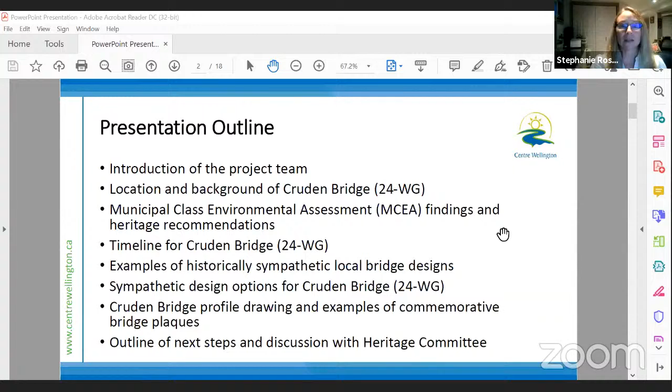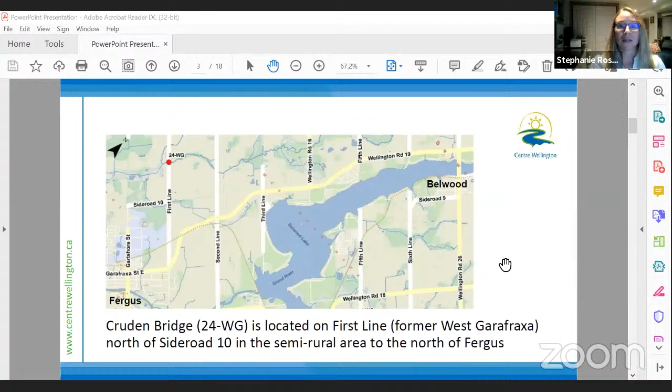So to give you some background on the Cruden Bridge, it is a 75-foot single span bridge. It is one lane and was constructed as a concrete bowstring arch bridge, and it spans over the Irvine Creek. It was built around 1922.

So the bridge was closed in July of 2018 due to the severity of its structural deterioration at that point. Later that same year, in 2018, we began a Schedule B Municipal Class Environmental Assessment to identify potential solutions to address the advanced deterioration and determine a recommended preferred option for what solution to move ahead with implementing.

So the EA study included a cultural heritage evaluation report, as well as a heritage impact assessment and a hydrologic and hydraulic analysis, as well as a natural environment review and an arborist's report.

Four alternatives were considered during the EA study. Those included the do nothing alternative, which is essentially maintaining the status quo of leaving the existing closed bridge in place, where the structural deterioration would continue and the bridge would remain closed. The second alternative considered was to rehabilitate the existing bridge in place. We also looked at replacing the bridge with a new bridge structure, and finally reviewed removing the bridge, which would mean that crossing along First Line would have been closed.

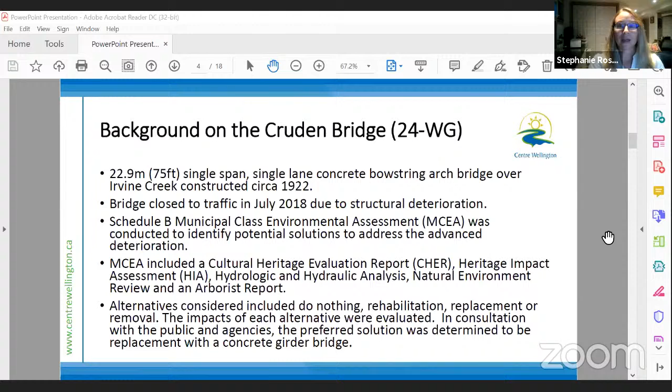So for the highlights from the Municipal Class Environmental Assessment, the recommendations of the Heritage Impact Assessment study regarding the bridge's sympathetic design and commemorative strategy included three main recommendations.

The first of those being that the bridge in its setting should be professionally documented before any construction started. That has actually already been done. It was included as part of the Heritage Impact Assessment and the Cultural Heritage Evaluation Report, and those documents are both available online at our website, connectcw.ca.

The second major recommendation from the Heritage Impact Assessment was that the replacement bridge structure should be designed in a manner that is sympathetic to the cultural heritage attributes of the existing bridge. For example, cast-in-place concrete barrier walls could be designed to incorporate visual elements sympathetic to the look and aesthetic of the existing bowstring arch bridge. One way of doing that is for the exterior finishes or impressions to be cast into the surface of the concrete barrier walls, featuring an arch design.

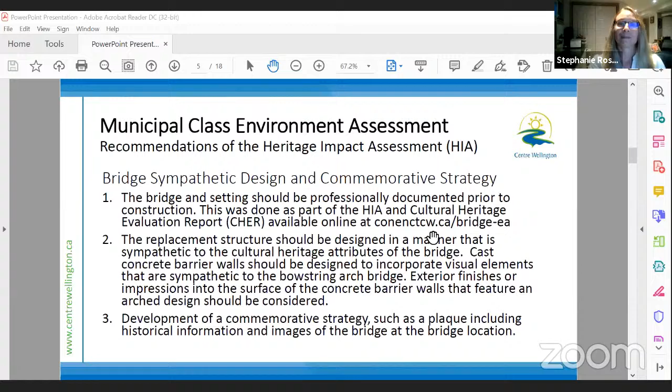To give an overview of the timeline for the Cruden Bridge project: the original bridge was built in 1922, and here we are roughly 100 years later getting ready to replace it in 2022. The bridge was closed in July 2018, and the Class EA began in November 2018. The EA process included two public open house meetings and two meetings with the Heritage Committee. The EA was completed, and the notice of completion was filed in January 2020.

Subsequently, in February 2021, we awarded the bridge design, construction, and contract administration to the Triton Engineering Services team. And here we are today in October 2021, beginning our consultation process with the Heritage Committee for our commemorative strategy.

Looking ahead, we hope to receive input back from the Heritage Committee around the middle of next month to find out which of the sympathetic bridge design options is preferred for the imprint in the concrete parapet walls. We've also allowed additional time for the Committee to provide input on the wording for the Heritage Plaque, and we're hoping to hear back on that by about March 2022.

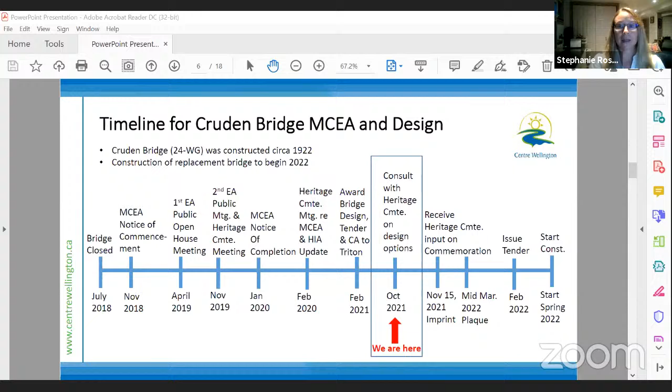I'll turn the presentation over to Dave, who's going to give us some examples of different cast-in-place impressions that have been used on other local bridges. Thanks, Stephanie.

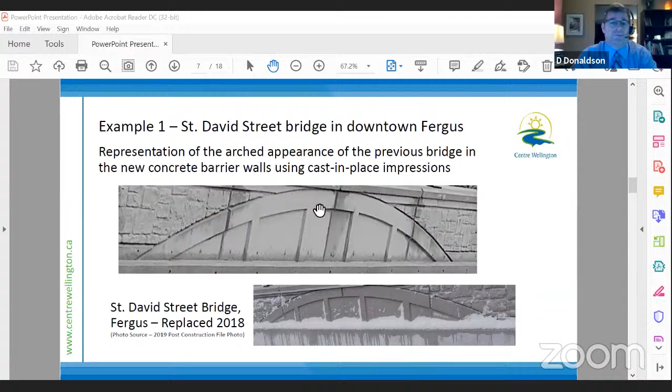And now I'm going to direct your attention to Chris Middleton of Doug Dixon and Associates for our Cruden Bridge presentation. Thanks, Dave. Hello, or good evening, everyone.

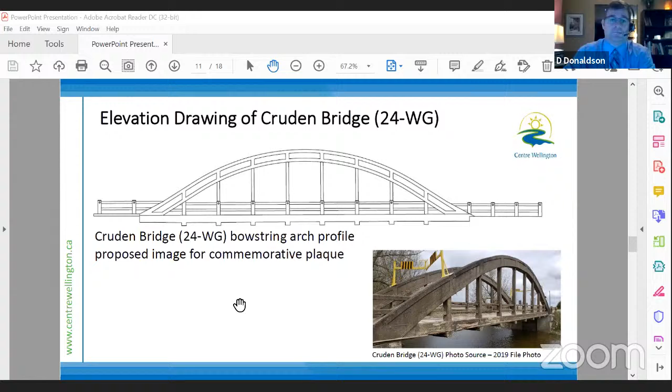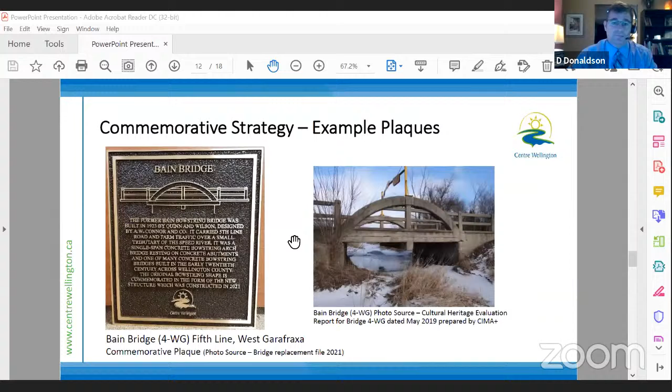Second example we have for you is back over in Elora for the former Victoria Street Bridge. Again, just a simplified version elevation drawing on the plaque with some commemorative narrative commentary put towards the previous bridge in its place.

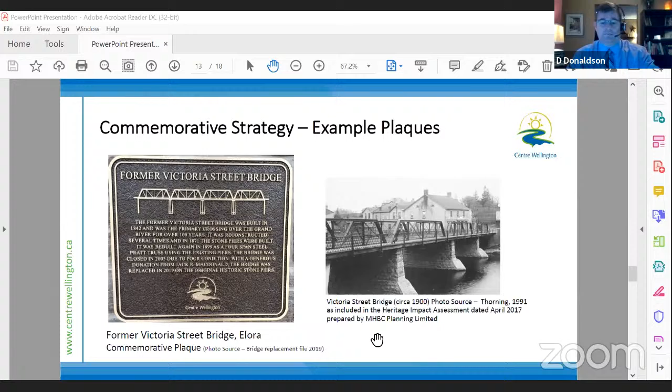The third example we have for you is the St. David Street Bridge, which was actually built back in 1926. Again, a small plaque which was used to commemorate the previous structure back in that era.

The next and final slide here we have for plaques was done on 27 WG on the former township of West Garafraxa out on the 20th Side Road. That was the Kerrs Hill Bridge. That plaque was put in place during that part of that construction back in 2017.

The next slide illustrates various slide plaque mounts. The first one on the left is a typical pedestal mount, put in at the St. David Street Bridge here in Fergus. The next two are the most common, used at the Kerrs Bridge and Bain Bridge, which are recessed plaque mounts. The last example, in the bottom right corner, is the surface mount, which is not as common.

For this particular example, for the first line for 24 WG, we propose not putting the plaque on a pedestal mount for two reasons. One, we don't have any sidewalk like at St. David Street to mount the pedestal on. Plus, since it's only a 2-lane rural road, we don't have a safe enough area for onlookers or tourists to park on the side of the road while traffic continues to go by, to view the plaque.

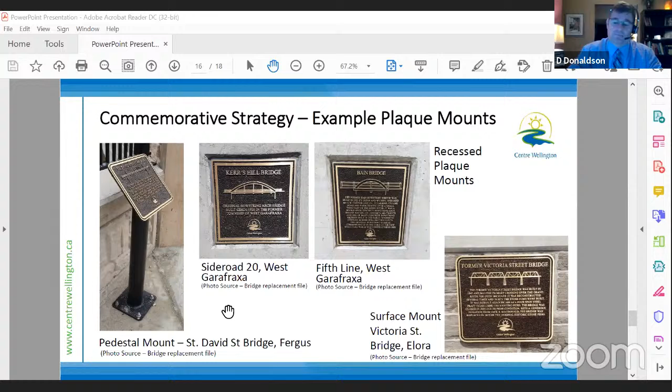Stephanie, I'll let you summarize. There you go, unmuted, that would help.

Thanks, Dave, for that. To highlight our next steps: today we hope to have a good discussion with the Heritage Committee and get some initial feedback on the historically sympathetic bridge design and the commemorative plaque, and to answer any questions you may have. We look forward to hearing from you, hopefully around the middle of next month, on what your preferred option is for the sympathetic design imprint for the Bridge 24 WG concrete parapet walls.

We've also allowed some time for the Heritage Committee to think about what wording they'd like for the historical narrative for the commemorative plaque. We're hoping to receive that input from the committee by about mid-March 2022, as well as what location they would prefer for the plaque to be embedded on the bridge itself.

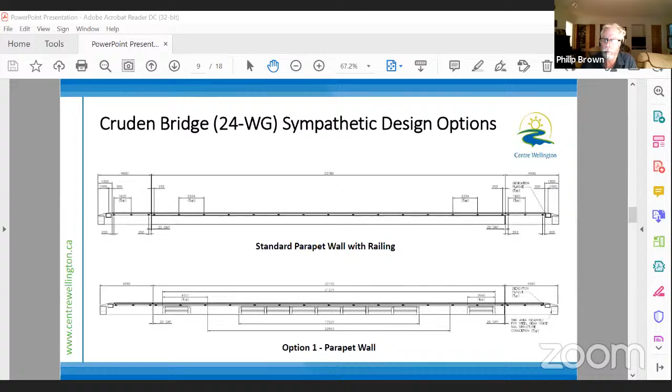Okay, thank you. It's Chris here. That's definitely very easy. We can take the single panels at the end there, which reflected the railing on the existing retaining walls shown in option 1, and just incorporate those into option 3 — just the one panel, or two rails between the two posts, there on both sides, easily combined with option 3 to make an option 4.

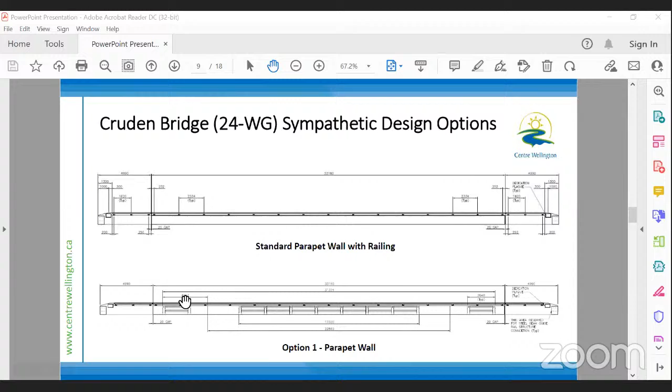And my other question was concerning the location of the plaque. I understand there's safety concerns, and I really wish each one of these bridges had some sort of a little rest area where the plaques could go.

Beside them, but obviously they don't, at least not at this time. Who knows, in the future there might be, because it would be access to the stream and the river there as well.

But I'm wondering, is there any thought of mounting—because I'm not sure who is actually ever going to see the plaque on the outside of the bridge in its location. I understand why it's there, for engineering and safety reasons. I'm wondering if it's possible to put the plaque on that sloped end of the bridge.

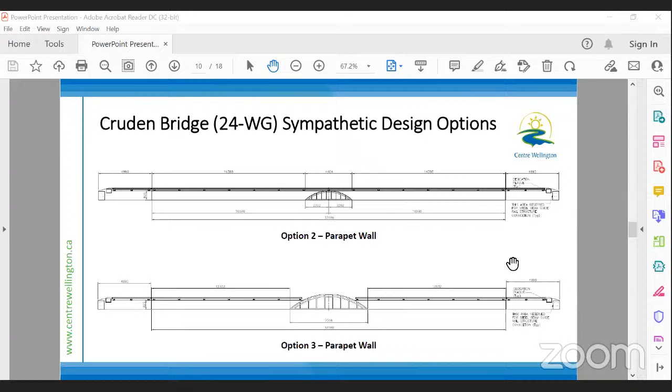Sorry, it's Chris again here. So on all of the options, you can see there's a rectangle at the end of the parapets, and there's a note right there, the dedication plaque. So right now we've currently shown it in the end post of the parapet wall, in the upper portion.

That would be on the inside face, on the road side. That's on the inside, okay.

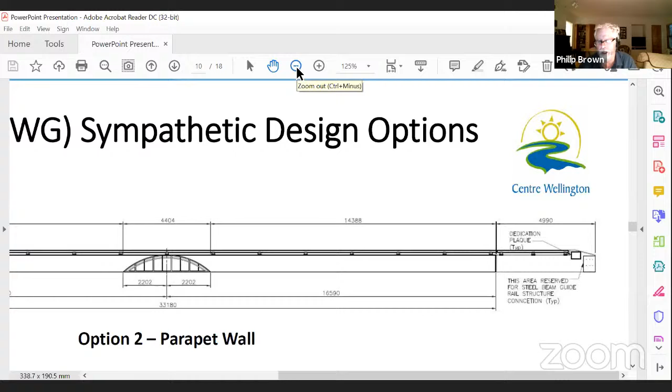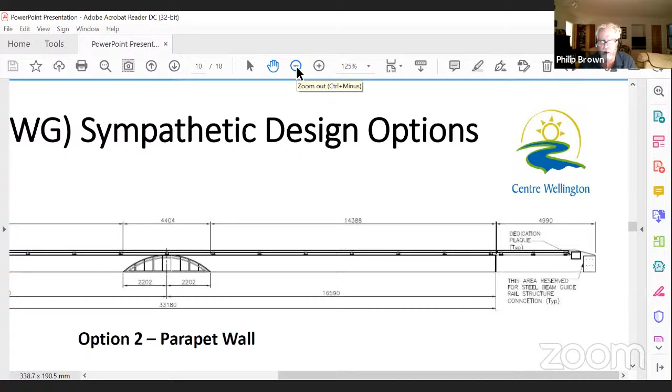I'm wondering, perhaps if somebody ever decides to go read that plaque, if they're on the southeast approach to the road, they'll actually be with their backs to the traffic. I'm wondering if it wouldn't be better to put it on the other side, so that anybody who did go look to read the plaque would be facing traffic, as a pedestrian should be.

There may be slope there though, Phil, is maybe what I'm considering. No, you're on the inside of the bridge—that's where the plaques are going, are they not? So you're walking, you're actually on the bridge surface. Are you suggesting to have it on the outside?

No, I'm suggesting put it on the southwest approach, on the southwest side of the bridge, so that a pedestrian would be facing traffic if they were intrepid enough to go read the plaque, so they'd be on the correct side of the bridge for pedestrians. I guess it would depend which direction they were walking in.

Well, the traffic is coming on that bridge from the north, traveling south. Obviously that's the traffic you would want to be on that side of the bridge for, if you follow my meaning here. Right, yes, it's a safety concern.

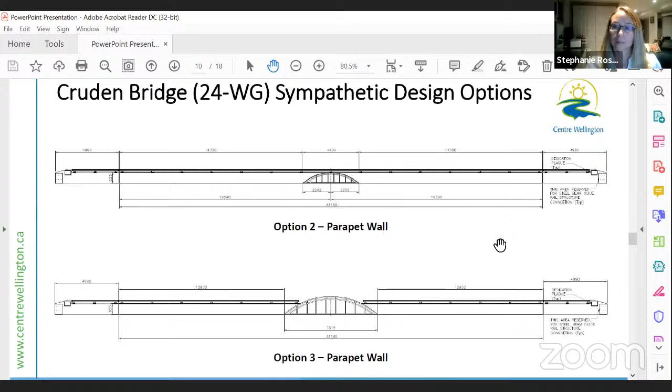Yeah, pedestrians should be, if they were to walk up to the bridge, then they would be reading it. And then of course, when they're walking away, they would have their back to the traffic.

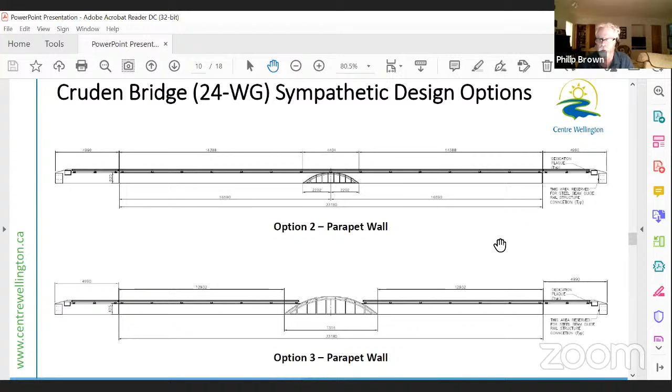But I don't know, just a thought—I was thinking, if you're driving, you may not see it because you're in the middle of the road. I don't think you're going to see it either way, unless you're really actually looking for it. But I'm thinking if you're driving, you might see it on the left-hand side, where if it's on the right, you might not even—I don't know. Just a thought.

Yeah, you guys can chat amongst yourselves.

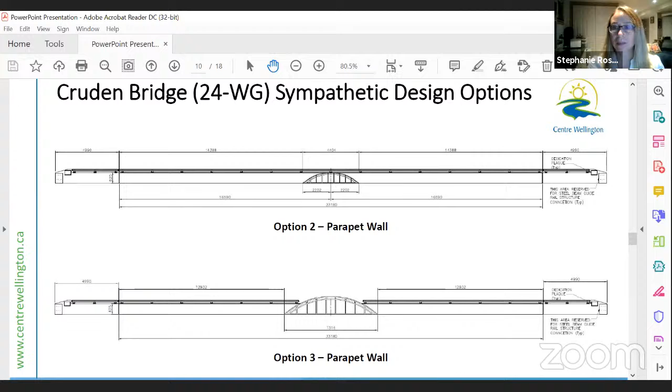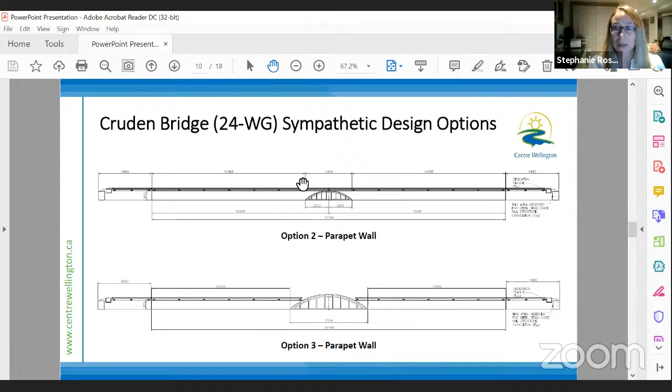If any of you are in the West Garafraxa area, the 4WG bridge on 5th line in West Garafraxa, the Bain Bridge, has that plaque installed now, as well as the arch design in the concrete parapet wall. You might be interested to drive by—I can't recall which end of the bridge they mounted the recessed plaque for Bridge 4WG, but you could take a look and see how you feel about it in person.

Similarly, Bridge 27WG, Kerrs Hill Bridge on Side Road 20, between 5th and 6th line, has a very similar brass plaque recessed into the concrete on the inside face. That bridge spans Irvine Creek, but it runs east-west, so for traffic driving into town or towards Fergus, they would see it—it's on the northeast corner. Yeah, 27WG's plaque is at the northeast corner.

So, on the inside face of the parapet wall, traffic driving into town from the rural area would see it as they approach the bridge, at the northeast corner. Anybody who goes onto the bridge to read the plaque is going to wait till there's no traffic coming anyway, in either direction.

Phil, you've brought up an interesting point, and I'm thinking more about standardizing. It would be interesting to consider the idea of standardizing where the plaque will be on many of these bridges, so we know where to look.

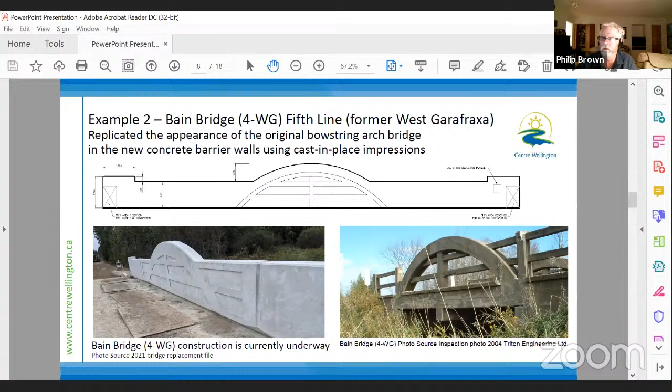I'm not back to my full screen here right now, but if anybody is trying to signal me, speak up. No? Okay, so if not, then Stephanie and Dave, thank you very much for being here.

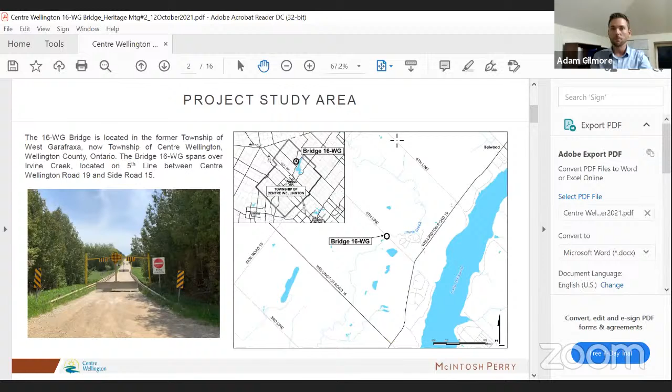So now we're here in October presenting on the preferred bridge solution, along with some very preliminary ideas on the heritage features to be considered during detailed design. In November, we plan on presenting the preferred solution to council for their endorsement.

Pending council's endorsement of the preferred solution, we would issue a notice of study completion, put the project file report on public record, and complete the study in late December, early January of 2022. We would then proceed with detailed design and construction, with construction starting in 2023.

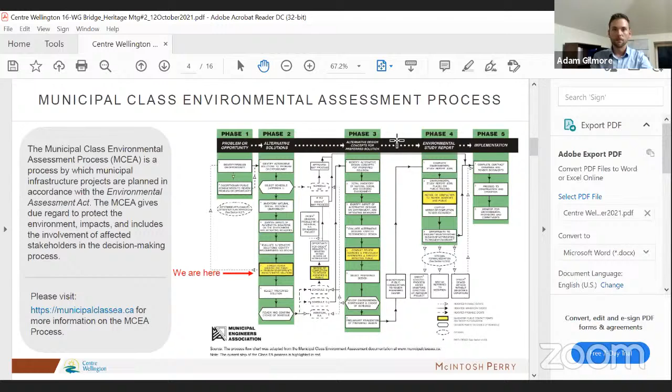So I'm going to turn it over to Lisa now to walk us through the alternatives and the evaluation. Good evening. So to address the problem and opportunity statement, the following alternative solutions were developed.

You would have seen these during our last presentation, but I'll quickly go through them again to refresh everyone's memory. Alternative 1 is do nothing, which involves leaving the existing bridge in place in its deteriorating condition and continuing to restrict public access. Alternative 2 is removal of the existing bridge and construction of new turnaround areas on the east and west sides of Irvine Creek. Alternative 3 is replacing the existing bridge with a new structure in its current location. Alternative 4 is rehabilitation of the existing bridge to meet engineering and public safety standards, as well as reinstating the existing water crossing.

As we highlighted at our previous Heritage Committee meeting, a Cultural Heritage Impact Assessment was completed for the study area in 2013, which found the bridge met one of the criteria for determining cultural heritage value and interest. A Cultural Heritage Evaluation Report was then completed again in May 2021 to provide additional analysis and confirm the findings of the 2013 HIA.

The HIA and the CHER determined that the bridge is a rare example of a solid spandrel concrete arch bridge from the early 20th century. Due to these findings, a secondary HIA was completed in July 2021 to examine the potential impacts associated with each of the alternative solutions identified and to make mitigation recommendations.

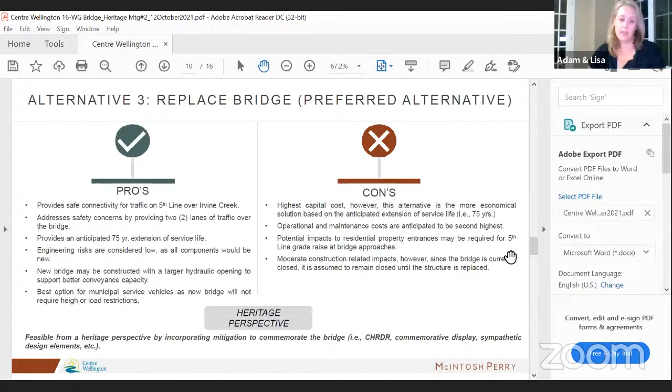Moderate construction related impacts, however, since the bridge is currently closed, it's thought to remain closed until construction, so that's why it's identified as minimal. From a heritage perspective, it's a favorable option by incorporating mitigation measures to commemorate the bridge: once again, a cultural heritage recording and documentation report, commemorative display, and a sympathetic design could be considered.

Alternative 4 is rehab. The pros: reinstate connectivity for 5th Line traffic over Irvine Creek, and no long-term impacts to emergency service response times.

The cons: rehabilitation is not considered viable from a bridge engineering perspective due to the current condition of the structure. It does not address safety concerns related to traffic capacity. The existing bridge doesn't meet current MTO design guidelines for vertical clearance, therefore it would be overtopped during the regional storm. Height and load posting may still be required after rehab, and the costs associated with the alternative are second highest.

However, this is the least economical alternative based on the extension of service life, which would be approximately only an additional 15 years. It's the most preferred option from a heritage perspective. However, rehabilitation is not viable from a bridge engineering perspective as the condition of the structure has surpassed the repairable state.

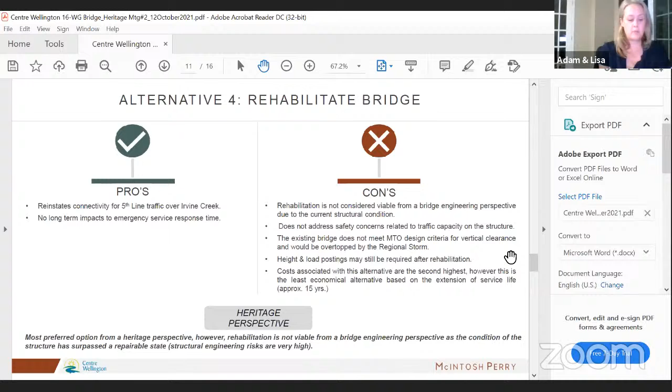In considering the social and economic impacts associated with Alternative 2 and the significant engineering risks with Alternative 4, the recommended technically preferred alternative solution at this time is Alternative 3, to replace the structure. This alternative has the best balanced benefits from a transportation, operations, and structural point of view, while maintaining minimal impacts to social and economic, as well as the natural environment.

However, from a cultural perspective, it would mean a loss of a rare solid spandrel concrete arch bridge. The 2021 HIA determined that this alternative is feasible.

However, if selected, bridge conservation measures would be put in place, such as completing a full recording and documentation of the structure, and also considering salvage of elements of the bridge to incorporate into the new structure or future conservation work displays, should it be considered.

However, the HIA did note further on in the report that the design of the existing bridge does not lend itself well to salvaging elements, as none of them can be removed or salvaged since the original balusters have already been taken away.

The HIA did recommend a plaque be installed at the site, and the content would include history of the bridge, photographs, and the landscape as it evolved over time. The HIA also notes that this alternative could also present an opportunity to honor the bridge by incorporating sympathetic design elements.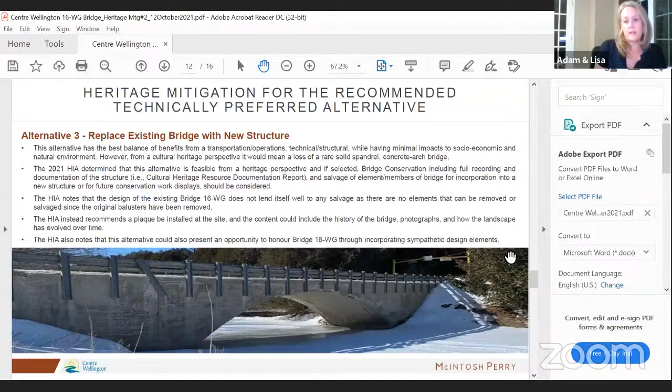The Cultural Heritage Resource Documentation Report would need to be completed by a qualified heritage consultant. It would include updated photos documenting the structure from all angles, photographs of landscaping surrounding the bridge, maps, physical description of the resources, detailed description of landscape and context, built drawings and heritage photos, and photographs of the bridge being demolished by a qualified heritage consultant. This document would then be filed with the Township of Centre Wellington, the Heritage Committee, as well as local libraries.

Adam, I'll throw it back to you if you want to talk about the plaques.

Thanks very much, Lisa, for walking us through that. So just to wrap it up here, in the last presentation the 24WG team did a great job walking through some examples of commemorative plaques in the township, so we wanted to emphasize that again here. That's definitely something we'll look at through detailed design. We've got the Victoria Street Bridge plaque, St. David Street Bridge, and the Kerr's Hill Bridge.

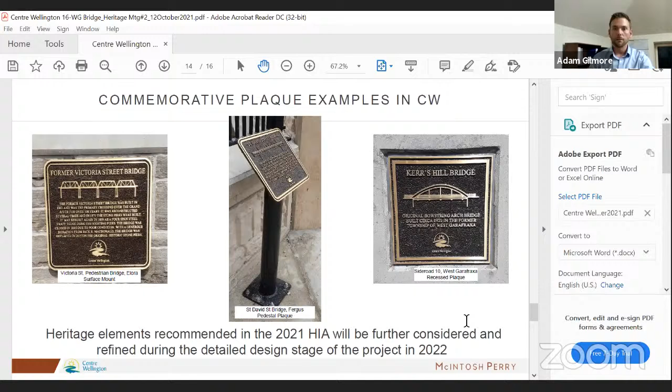These elements will be further considered and refined during the detailed design stage of the project in 2022.

To recap our milestones, we're here with you today to get the committee's input on our preferred alternative. We plan on presenting it to Committee of the Whole on November 22nd for Council's endorsement. We would then advertise a project file report as required through the Municipal Class EA process in December, wrapping up in January with the notice of study completion and recommendation to proceed to detailed design. Design would be completed in 2022 and construction in 2023.

I want to emphasize, I think we have this great consultation model with the Heritage Committee where we're touching base with the committee at various stages of the project. As you saw in the last presentation, that project is further ahead than this one, and we want to continue to do that. So through the detailed design stage, we would be coming back to the Heritage Committee for further input on the design itself and to present some options.

Thank you very much. That's everything we have, and happy to answer any questions or field any comments you might have.